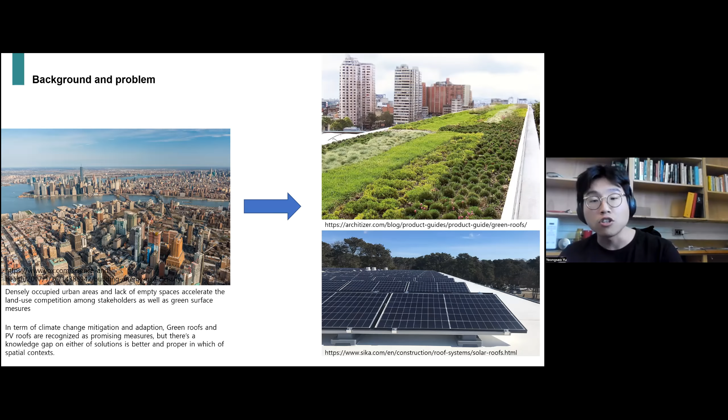And also, there was a knowledge gap over which green surface solution is appropriate in which spatial context. And since both green roofs and photovoltaic roofs are very important and they have unique environmental and social advantages in terms of climate change adaptation and mitigation, these limitations should be addressed as soon as possible.

So one approach that we can think about is vertically stacking and integrating photovoltaic panels above the vegetated surface. And according to the concept and theory of urban metabolism, increasing the efficiency of energy and matter circulation in an urban area is very crucial to make the city sustainable and resilient. So for example, one of the reasons that we are doing either photovoltaic roofs or green roofs is to retain more rainwater and to produce energy on-site while reducing artificial imports from outside the city.

So therefore, in order to improve the efficiency of energy and matter circulation, it is important to think about how we can use land in a very efficient and productive way. And many underutilized spaces, such as parking lots and building rooftops, could provide untapped potential for improving efficiency by adding an additional energy layer over the existing land uses.

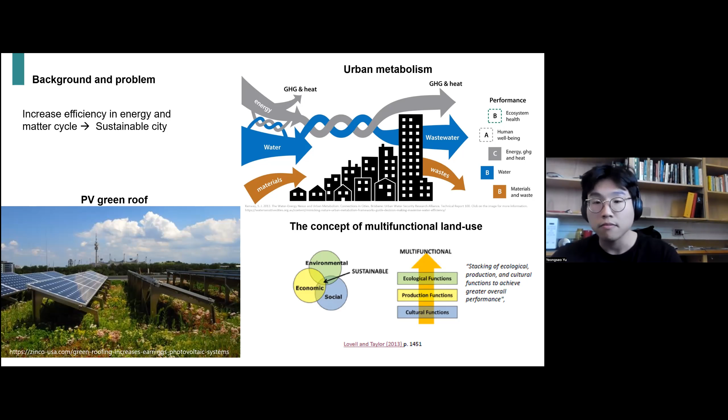So this is today's case study site, a photovoltaic green roof project. Sometimes this photovoltaic green roof is called a biosolar roof. This was carried out on the rooftops of two adjacent buildings in downtown Sydney, Australia. The project was led by Peter Irga from the University of Technology Sydney, and it was funded by the City of Sydney Council, with research carried out to prove the various environmental effectiveness of photovoltaic green roofs.

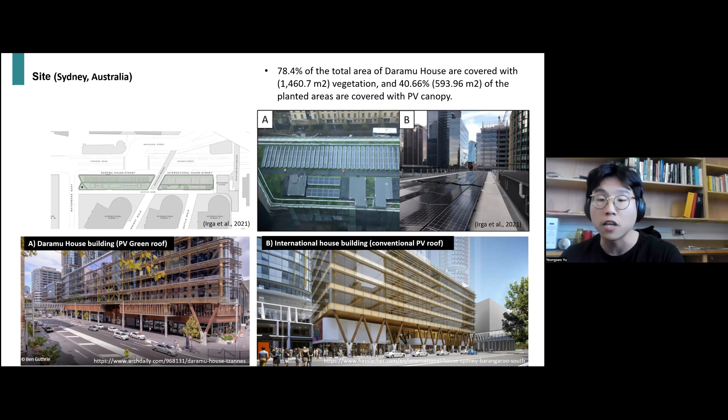So the team installed a solar photovoltaic panel array over an existing green roof of the Daramu House building and a typical solar photovoltaic roof of the International House building, respectively.

As a kind of comparative study, the research team compared the photovoltaic green roof to the typical solar roof in order to reveal the advantage of the photovoltaic green roof. They directly measured and collected data related to the following 5 factors: biodiversity, air quality, thermal insulation, stormwater runoff management, and the performance of the photovoltaic roofs.

And these are some of the photographs of the sites. As you can see in the images, the photovoltaic panels are installed over vegetation cover that consists of low-height shrubs, grasses and sedums, and the photovoltaic height is just slightly higher than the height of a person's knee.

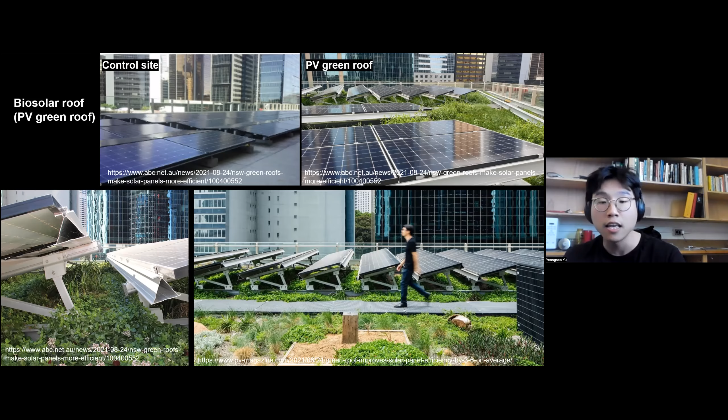So they analyzed biodiversity improvement with the Shannon's diversity index by including the presence of insects and birds. And the research team observed that the presence of the green roof resulted in a 9-fold increase in insect species and a 4-fold increase in avian species diversity.

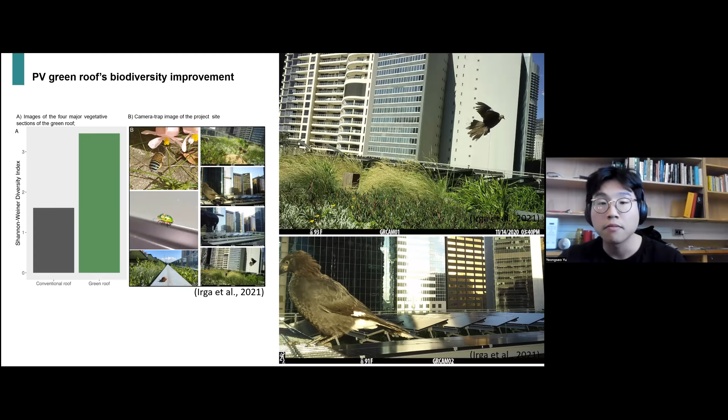The research team also proved through field measurement that the photovoltaic green roof is likely to improve the air quality more than the typical solar photovoltaic roof. I highly recommend you read the original report, and you will find more detailed information about this.

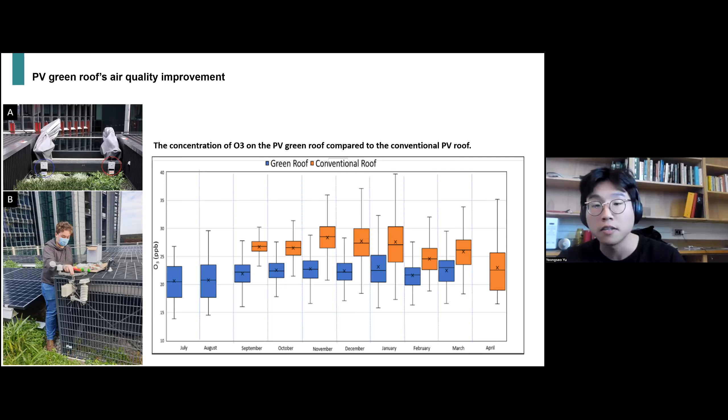The research team also investigated the thermal insulation effect of the photovoltaic green roof by using a thermal camera as well as temperature sensors, and they monitored the vertical temperature profile of the 2 roofs. For the result, for temperatures below the solar panels, both the average and maximum daily temperature were significantly lower on the photovoltaic green roof than the conventional solar photovoltaic roof under similar solar radiation conditions.

However, minimum daily temperatures on the photovoltaic green roof were higher than those on the conventional photovoltaic roof. So they concluded that the insulative capacity of the green roof not only prevents heat transfer indoors, but helps retain heat during colder periods.

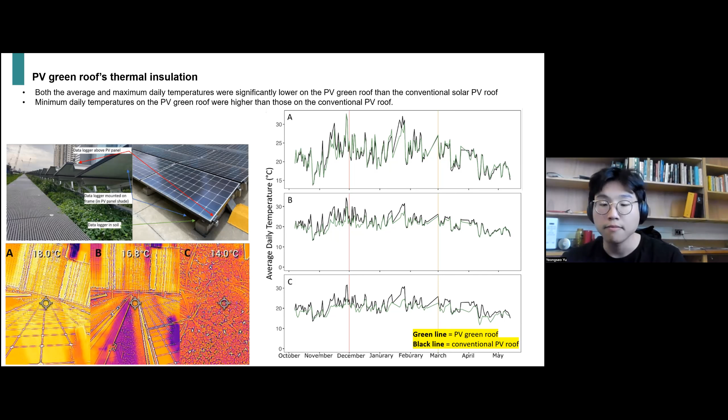In general, collocating photovoltaic panels over green vegetation can improve photovoltaic energy generation efficiency by 2 to 5%, which is revealed by some other empirical studies. And particularly in this project, the research team identified a 3.63% improvement in photovoltaic efficiency on average per year.

And also based on their estimation, the photovoltaic green roof can mitigate 55.9 tons of carbon dioxide, and the typical photovoltaic roof can mitigate 48.22 tons of carbon dioxide respectively. This difference in energy production is equivalent to 110 trees planted, with an additional 1.1 tons of carbon dioxide potentially mitigated by the photosynthesis activity of the plants.

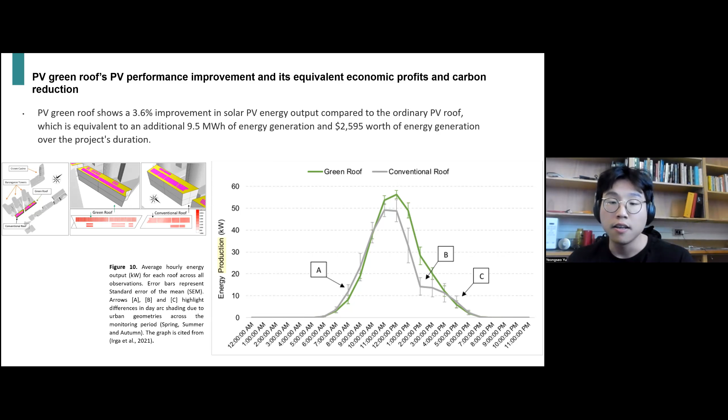So here are some key takeaways. For the economic benefit, the photovoltaic efficiency improvement can be very helpful for the owner of this investment as a way of making another profit. And for the environmental benefit, it will have an additional carbon sequestration effect from vegetation under the photovoltaic canopy, and it can increase urban biodiversity

while supporting the complex food web system in an urban area, and it can also decrease the ground and building surface temperature, and there may be a contribution to mitigating the urban heat island effect. It can also contribute to reducing stormwater runoff, and it can improve air quality, although it may differ depending on the types of molecules.

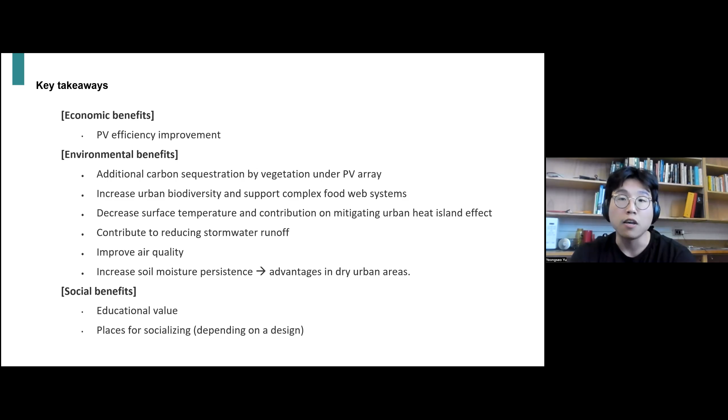And then it can increase soil moisture persistence, which can be a huge advantage in very dry urban areas. And for the social benefit, there will be some educational value, and depending on the design, this photovoltaic green rooftop can be a place for socializing for the local residents.